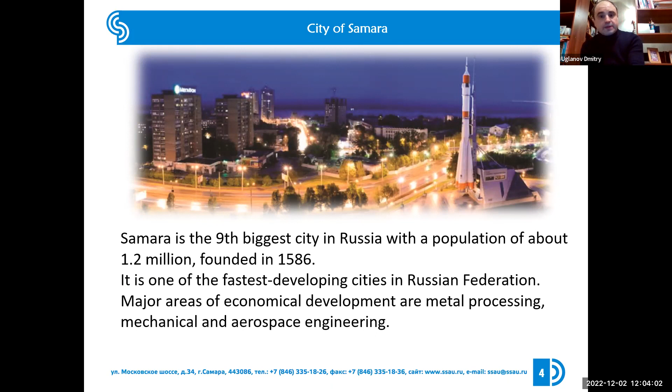We have good and deep cooperation with different universities, and now the main areas of research and education activities you can see here: space engineering, aeronautics, aerospace engine construction, dynamics and vibroacoustics, perspective materials and technologies, laser systems, information technologies, space informatics, physics, chemistry, gas dynamics, and of course energy.

For this reason, our faculty deals not only with aircraft engines but also with power engineering. We have some specialized education programs which deal with energy and energy saving processes.

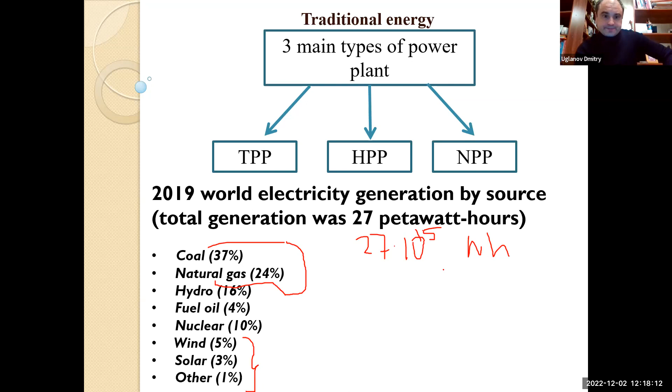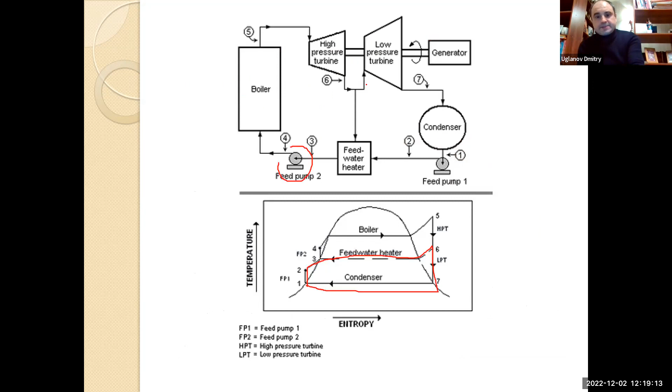What's interesting for us is that it's possible also to use it like renewable energy, because of course there are some problems and disadvantages of thermal power stations - exhausted gases, CO2, and also some oxides like oxides of nitrogen, which have a big and bad influence on the environment. In this case, with hydroelectric power, we don't have any exhausted gases. Only, of course, we have some problems with changing the environment around the station.

But if we speak for small electric power systems, hydroelectric power is very good, and it's one direction that gives a change. It gives a possibility, especially in countries which have a lot of small rivers or lakes, to create very small hydroelectric power plants, and they don't especially create such dams. It is a real green technology.

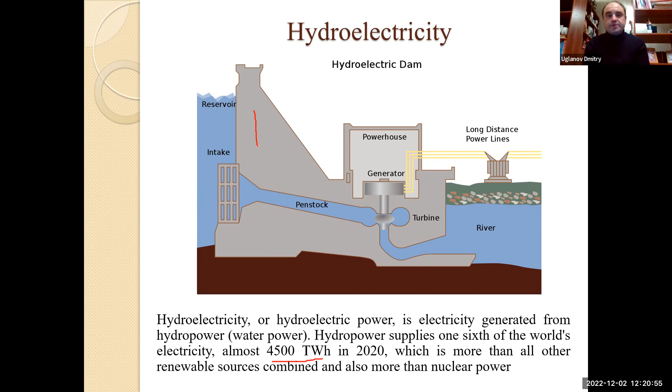Of course, now a lot of hydraulic power plants have a power of about 1 or 2 gigawatts of energy. The biggest one now is in China, and it has a power of about 22 gigawatts. It's very big, of course, but such a system has a big damage to the environment.

Third in this is a traditional energy power plant: the nuclear power plant. A nuclear power plant, sometimes abbreviated as NPP, is a thermal power station in which the heat source is a nuclear reactor. So instead of a boiler, we have here a reactor. Typical of a thermal power station, heat is used to generate steam that drives a steam turbine. You can see here it is also like a boiler, with water.

In the first level of development of nuclear power stations, and the second level of development of nuclear power stations, they used water, but now some of them it's possible to use sodium.

If we return, we can see water receives energy from the reactor. It increases power, pressure, and temperature, and we put it in the turbine. Then after the turbine, we have again a heat exchanger, here it is a pump, and we have a Rankine cycle again. So we have first loop, second loop, and third loop.

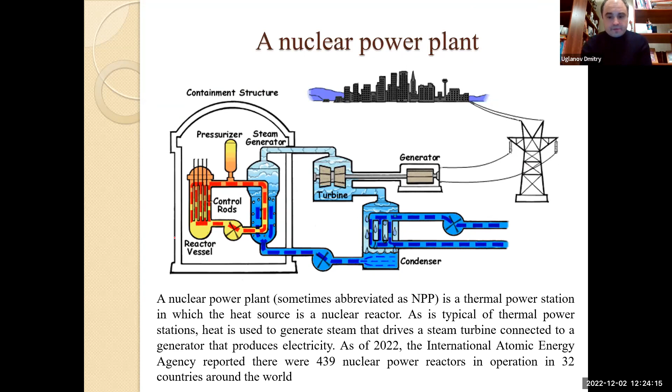The chain reaction goes without any stopping process, it's very hard to stop. For this reason it has some additional cooling system for safety and demand.

Some words about fuel. The development of electric power and heat supply is based on the use of various natural energy sources. Organic fuels have occupied a special place among them for a long time. We have organic fuel, which is natural and artificial.

Why do we use organic fuel? Because it has a high heat energy of combustion. The heat of combustion is the main energy characteristic of various types of fuel. It is determined by the amount of heat released during the complete combustion of a unit of mass or volume. The heat of combustion is measured in kilojoules per kilogram or in calories per kilogram.

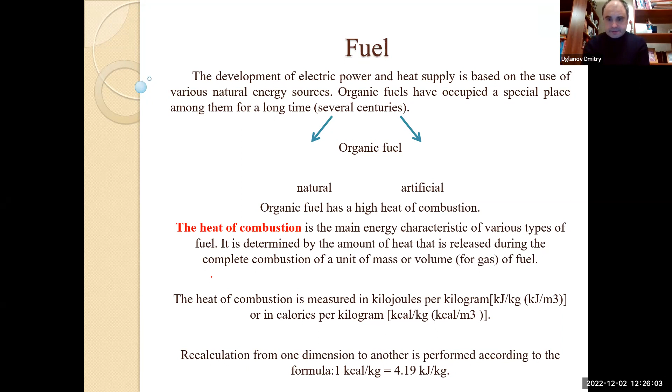As we can see from my first list of presentation, the main fuel in the world now stays coal. But we can make classification according to the aggregate state of organic fuel, and it could be divided into solid: coal, brown coals, shale, peat, wood fuel. Liquid: oil or petroleum products, like gasoline, kerosene, and fuel oil. And gases: natural gas and methane.

Some words about coal. Coal is an extremely broad concept that includes very different natural minerals. Common to which is that they are solid and contain a sufficiently large amount of carbon in their composition. According to the time of saving in the earth, coal could be divided according to heat of combustion.

For example, brown coal, they are young coal, they have about 8-21 megajoules per kilogram. Middle-age coal has about 17-27 megajoules per kilogram. And anthracite is very old and very good quality.

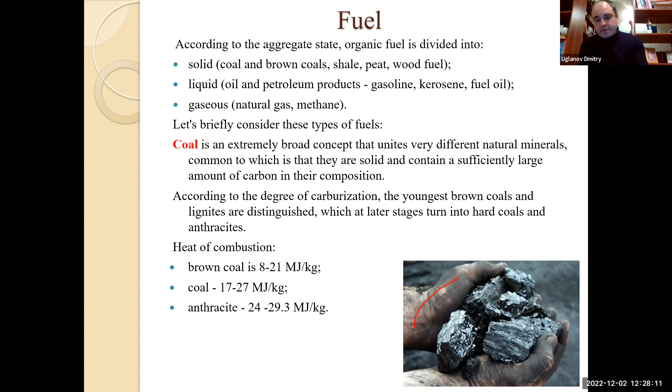Second, if we continue our talking, oil is a dark brown, viscous and oily liquid, and it has a higher heat of combustion, about 45-47 megajoules per kilogram. Light fractions for motor fuels, like gasoline, kerosene, diesel fuel, and petrochemical raw materials are obtained from oil by its shallow processing, and the remaining fuel is used as a boiler or furnace fuel.

Fuel oil, which is used in thermal power plants, has heat of combustion about 40-42 megajoule per kilogram. We can receive different products of oil refining, like gasoline, diesel fuel. They are received during some boiling process, and they have an evaporation temperature about 180 degrees Celsius for aviation gasoline and kerosene, and diesel fuel has about 270 and 400 degrees Celsius.

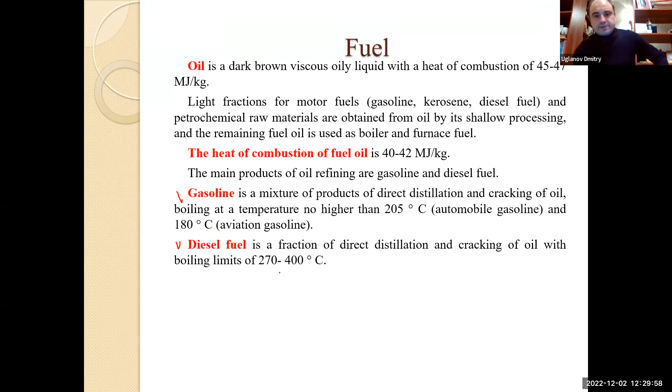Some words about natural gas. Natural gas is most often found together with oil, and for this reason we have a classification for all deposits used according to the ratio in reservoir to the oil. If we have less than 1000 cubic meters of gas per 1 ton of oil, it's considered associated gas. If 1 ton of oil accounts for 1000 up to 20,000 cubic meters of gas, it's considered gas condensate, and if more than this value, it's called purely gas storage, a gas place.

Gas condensate deposits contain not only condensate and natural gasoline but also ethane. Ethane is used as the basis of polyethylene production, as well as propane-butane fraction, which is used in liquid condition as fuel for some cars.

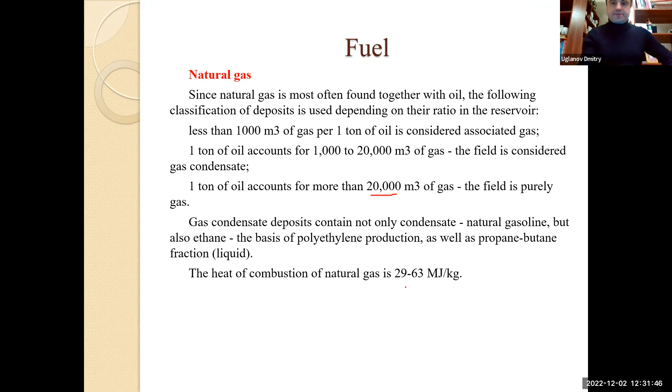We have different combustion heat values, from 29 until 63 megajoule per kilogram. So it's comfortable to use the concept of conventional fuel, because we have different types of fuel, and it's shown as some standard conventional fuel that we use. Conventional fuel is considered a fuel with heat of combustion about 29.3 megajoule per kilogram.

It corresponds to anthracite coal. And if we would like to make conversion of the amount of natural fuel, for example gas or liquid fuel, into conventional fuel, we use this expression: B nat, the amount of natural fuel, and Q, the lowest working heat of combustion of natural fuel.

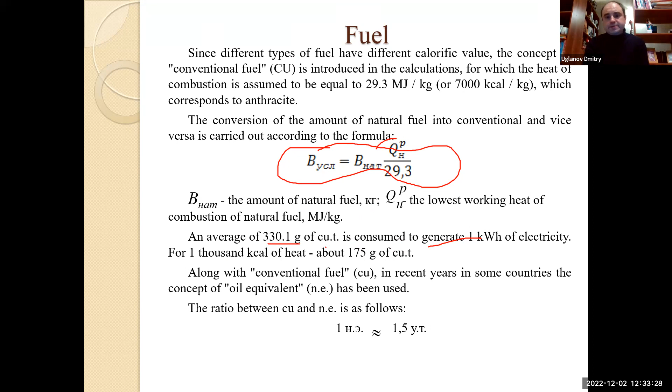For example, on average 330 grams of conventional fuel is consumed to generate 1 kilowatt hour of electricity. And if we would like to receive 1000 kilocalories of heat, we need to spend about 175 grams of conventional fuel.

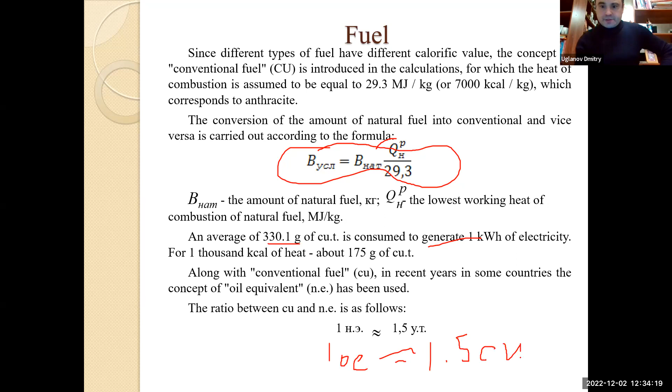Sometimes, because conventional fuel is used a lot, and the world's development has a big dependency on oil, for this reason oil equivalent is sometimes used. Oil equivalent has this connection with conventional fuel: one oil equivalent is approximately 1.5 conventional units. So this is sometimes also comfortable to use.

Some interesting point: last century shows very fast increasing of energy consumption. Of course, energy consumption depends on the number of inhabitants on Earth. In 1950, for one inhabitant in the world, it took about 1 ton of conventional fuel per year. In 1975, this value increased to 2 tons per year. By the beginning of this century, we have about 5 tons of conventional fuel.

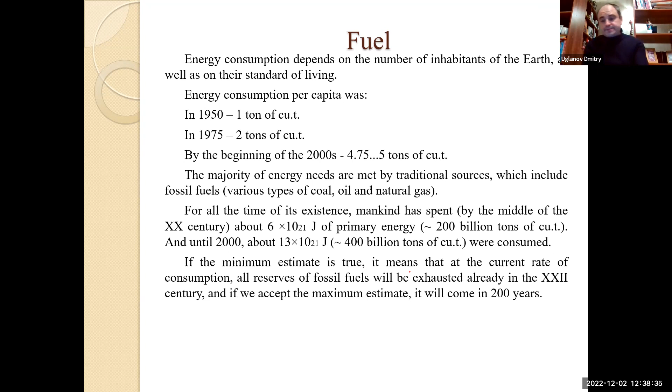And of course, for this reason, people may make a return to renewable energy. So what does renewable energy mean? It's the sources of energy resources that are inexhaustible within the time horizon of humanity.

And if we consider renewable types of energy, they can be subdivided into 3 areas: solar energy, planetary energy, and geothermal energy.

I think, of course, you know from history that during a lot of time, people used wind energy for sailing in the sea and oceans, for mills, and other applications before creating electric power. Then with the beginning of the age of coal, and then oil, with thermal power station development and car development, people forgot for some time about solar energy, wind energy, and so on.

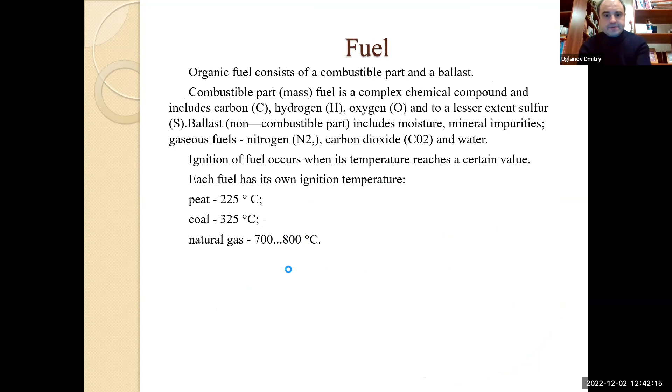Increase efficiency and use, for example, the heat of exhausted gases. Sorry, some problem, I'm sorry, some problems with my PPT. I'll open it. Sorry, wait a moment.

Okay, let me... I hope you can see. Yes, we can see.

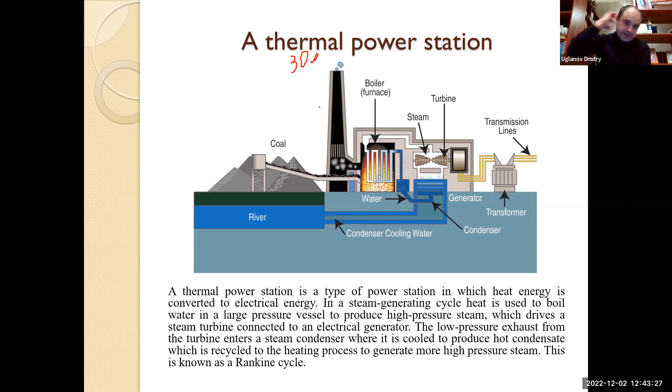So second, as I said, people started using, for example, exhausted gas energy because we have temperatures about 300, maybe 400 degrees Celsius. It's possible to use this as heat energy, or it could be a source of energy for another power plant, and so on. That's the first way. And the second way, people started thinking about using renewable energy.

And of course, at this moment, it's not right to say that people don't use solar energy. The use of solar energy starts from aerospace applications from the 1950s, because when the Soviet Union launched the first artificial satellites, it was necessary to have some power, but it was not possible to put a lot of fuel aboard the satellite, so they put solar panels, which gave a chance to receive electric power for satellite purposes.

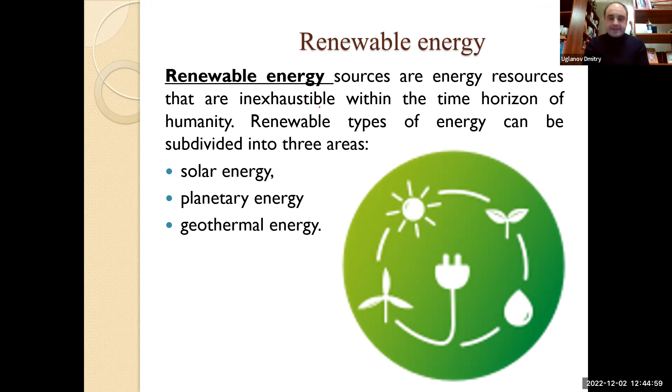Of course, in the beginning, the efficiency of solar power systems in the 1950s was very small, about 3-4%, but it was a way to find energy in space. In the 70s, people returned to it and started to use it, also with wind energy, geothermal energy, and so on. Let's discuss and speak about it.

Okay, so solar energy is the biggest source of energy. You can see it's a very big energy, about petajoules per year. And if we use only 0.01% of this energy, we could cover all the power that we need for living, for all people in the world.

Planetary energy is taken with gravitation, and sometimes, as you may know, using ocean stations with this effect, the level of the ocean increases and decreases. This happens daily according to moon and Earth rotation.

And geothermal energy, because inside our Earth, for example, 1 kilometer down, the temperature increases by 3-5 degrees Celsius. So in the center of our Earth, we have a temperature of about 4,000 degrees Celsius. For example, the surface of the Sun has about 5,500 degrees Celsius. So it's a very big value.

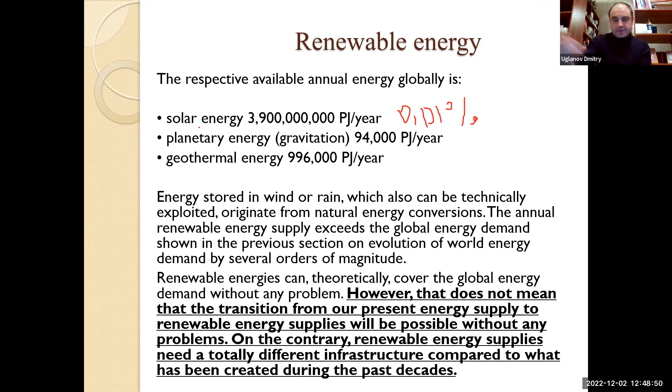Some moments about solar energy and wind power. Solar energy is also the reason we have wind in some parts of our Earth. This wind happens due to different temperatures, different spaces in the atmosphere with different densities. But the first reason of wind and air flowing is the solar too.

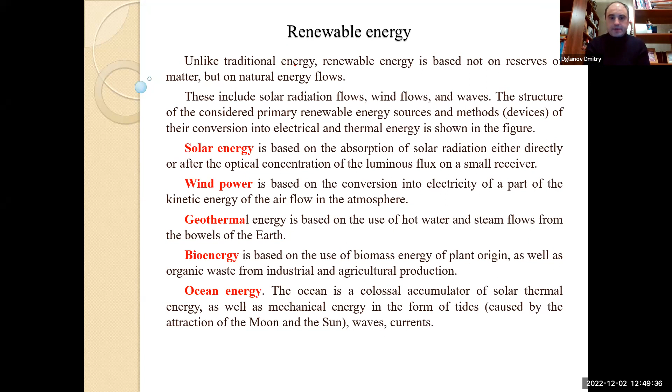Wind power, yes, geothermal, we said. Bioenergy is based on the use of biomass energy of plant origin, as well as organic waste from industrial and agricultural production. Ocean energy - the ocean is one of the biggest accumulators in the world of solar thermal energy, as well as mechanical energy in the form of tides caused by attraction of the moon and sun, as we said before.

Okay, so some moments about general features of renewable energy. Renewable energy during the cycle of human life is permanent and practically not depleted. It's not dependent on resource constraints, and has wide geographical distribution - for example, as opposed to local mineral deposits like coal or gas.

Relative low environmental impact - relative, because frankly speaking, we don't have a pure ecological way to produce energy in the world now. Maybe we can say this only for small hydroelectric power systems. But if we have a big system, it also has an influence, not a very good influence, on the environment.

Low renewable energy density, and in most cases, the frequency of supply is irregular, not only seasonally but also daily - for example, solar or wind. The joint work of renewable energy sources with thermal and electric energy accumulators makes it possible to equalize power pulsation, store and give energy to the consumer in periods when there is no energy flow from the renewable energy system. So we need to find a good storage system for it.

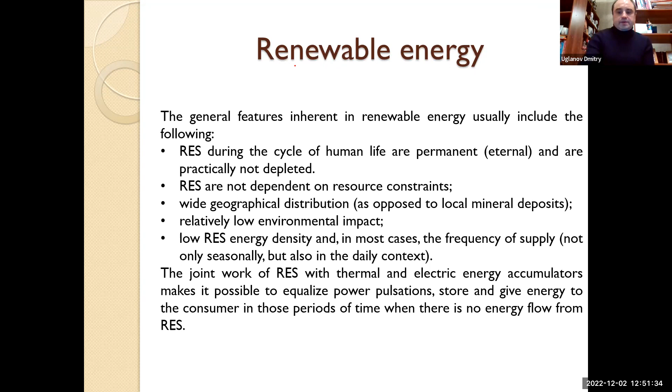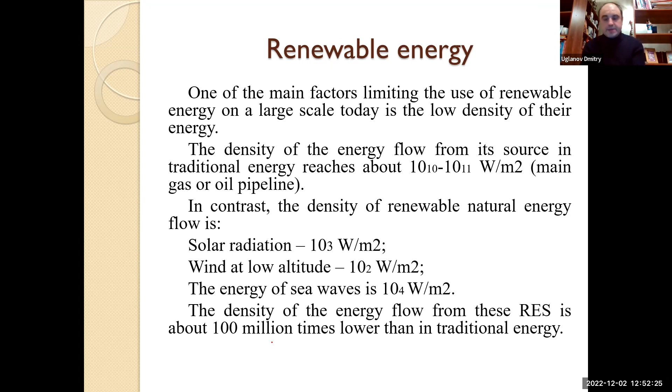Now you can see the density. The density of energy flow from traditional energy reaches about 10 to the 11th degree watts per meter square, for example gas, etc. For solar radiation we have 10 to the 3rd watts per meter square, or wind at the Earth's surface 10 to the 2nd degree watts per meter square. So we can see the density of renewable energy sources is about 100 million times lower than traditional. This is the disadvantage of it.

So you can see a very good picture here - annual solar radiation. By far the largest energy resource, as I said, is the sun. Annually it's 3.9 times 10 to the 24th degree joules. As I said, people now consume energy in a year of about 4 multiplied by 10 to the 20th joules. So we can see it's 10,000 times more than we need.

This is the global energy demand now, shown here very well proportionally - coal resource, gas resource, oil resource, and uranium. In other words, as I said, using just 1/10000 part of incoming sunlight would cover the whole energy demand, but it's not a simple way to do this.

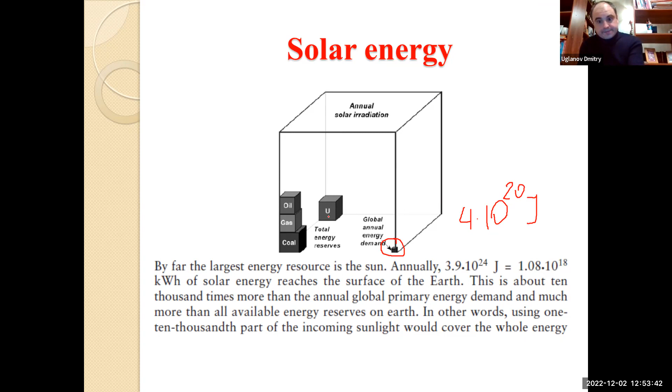So the following technologies can utilize direct solar energy: thermal power plants, photolysis systems for fuel production, solar collectors for water heating, passive solar heating systems, and photovoltaic solar cells for electric generation.

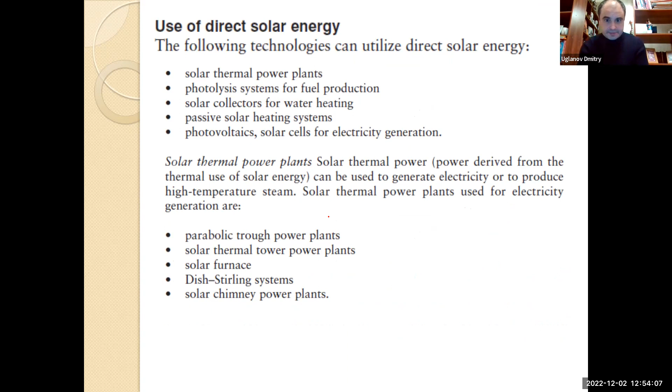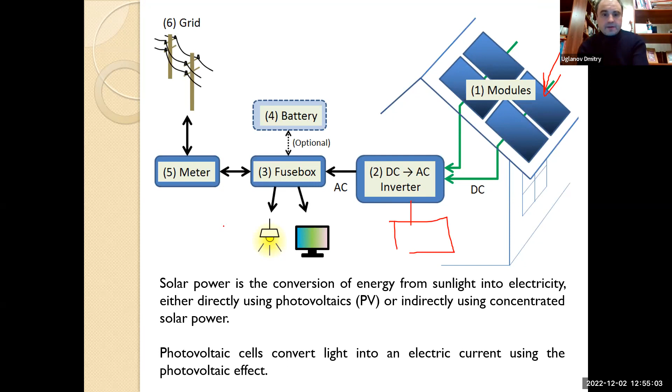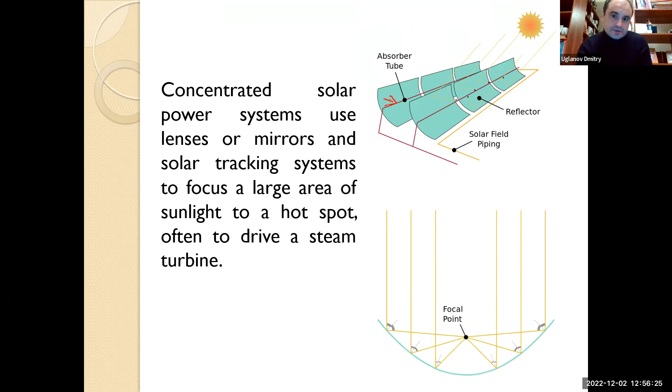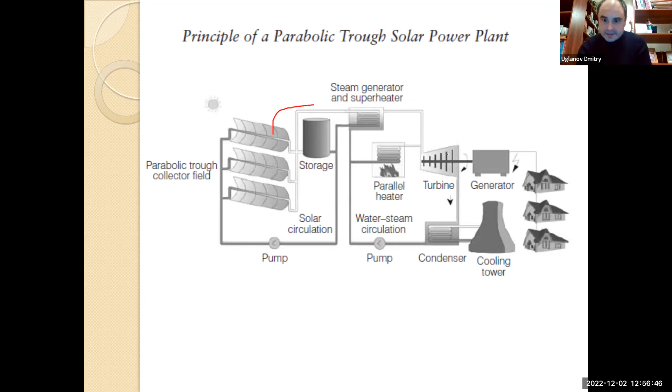If we return back, we can see this is again a thermal power plant, but instead of oil, instead of a boiler, we use a parabolic collector field, and we use this energy - as shown here. The pump goes here, and here it is, for example this is the absorber tube. In this tube water flows, but energy is concentrated to the tube, and it increases the temperature inside. It means that instead of a boiler, we create conditions where water temperature increases, then we have steam power, and steam goes to the turbine, and we produce electric energy here.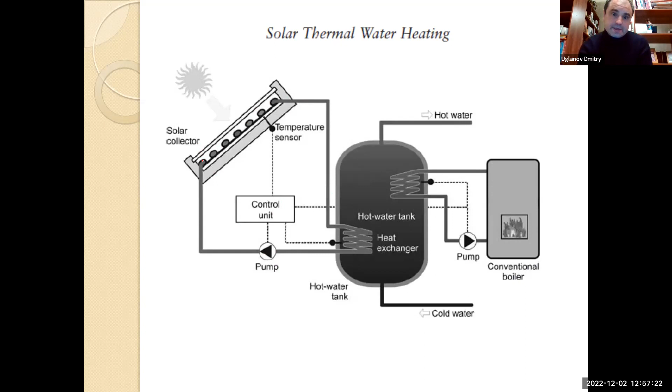So here is a simple way to use solar for heating. We have water, or sometimes an alcohol mixture is used - water and C2H5OH - and we create concentrating energy in these tubes.

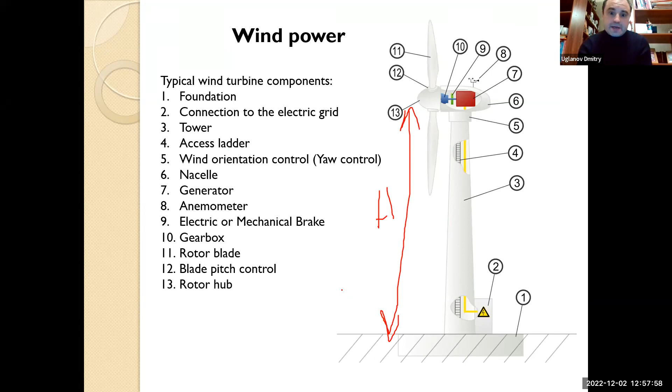Okay, wind power. We can see this is a typical wind power system. Of course, it takes some technology from aviation. The main moment is that we need to have a very high altitude position. Why do we use this?

Because we have increasing velocity according to this law: h0 and here is 1/7. So it means we have increasing velocity with the increasing altitude, and usually this altitude is about 100 meters. Inside of it we have the rotor and gear, rotor blade.

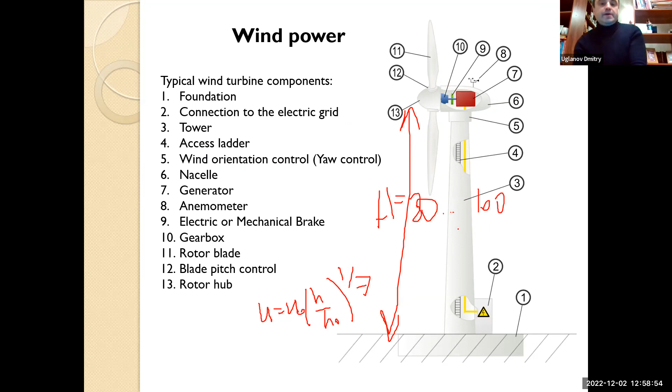Here it is rotor blade, blade pitch control, gearbox inside. Here it is generator, and we have connection with the electric systems. So, geothermal energy, some words about it.

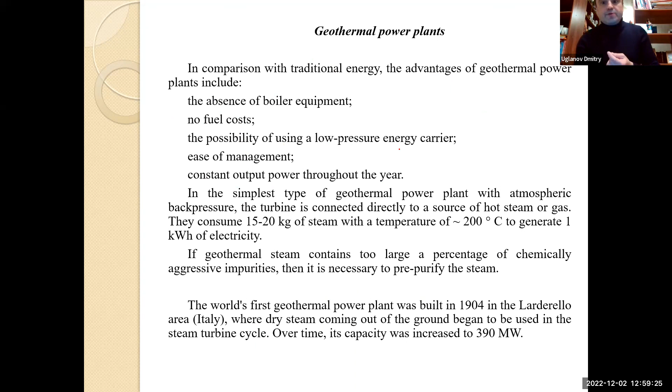If we pay attention, sometimes unfortunately we don't have enough time, so give me 2 or 3 minutes. In comparison with traditional energy, the advantages of geothermal power plants include absence of boiler equipment, no fuel costs, and the possibility of using low pressure energy carriers. Usually we use some heat water, or steam-water mixture.

It comes from some production well, like shown here, from some deep zone, with a temperature of about 150 or 200 degrees Celsius.

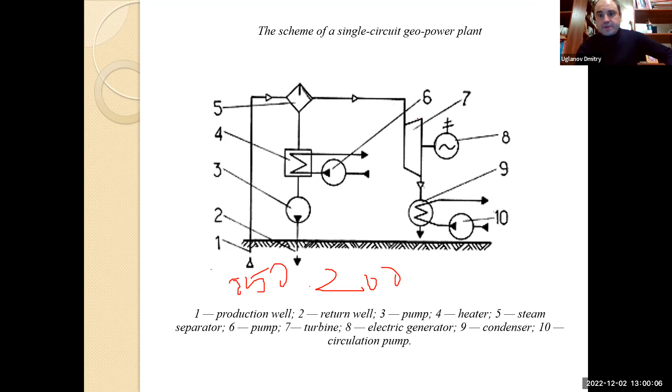Here is the scheme of a single circuit geothermal power plant. It goes here, we have a separation, and water steam goes to the turbine, and we have again a Rankine cycle. And the second one is a two-circuit system.

When we use this, instead of a thermal power plant which uses coal and gas, we use this water mixture, steam-water mixture. It goes here, we take energy again. Here it is temperature 200 degrees Celsius, and here it is a Rankine cycle.

Instead of water, the only peculiarity is we use some working substance which can boil at a low temperature, like freons, for example R134A. But it's again a thermal power plant, only we don't boil, we don't burn any fuel here.

Heat pump. This is a system which technically utilizes low temperature heat in the ground and air, as already mentioned. It's also used with geothermal energy, so it means we take some energy from

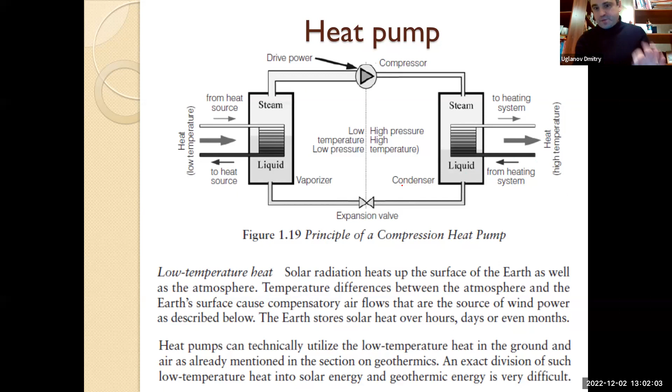Unfortunately it's not enough time, I'm sorry for some delay. If you have any question, don't hesitate, ask me. I can give you my email address, we can use it. You can ask me any question and I will be happy to answer if you want. Okay, ready for your questions.